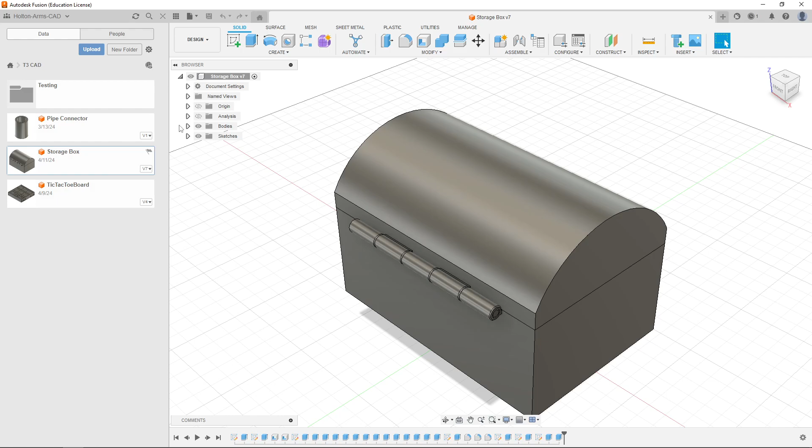I had shown you my example, and I'll just briefly open it up again so you can see this simple design. We can see there's the hinge. In this case, there are two parts of the hinge. If I hide the top and the pin as well, you can see the bottom part has three of the hinge connectors on it. And if I show the top and hide the bottom, you can see the top has two. The combination of both of those when they're lined up properly is 5.

And then down the middle of the hole, we want to have a pin that connects them so they're connected as one piece and they can rotate around that, right? And so that's the pin. We could put outer points in the pin so it's easy to grab, but it's not really necessary. Typically these things are metal, but even if they're plastic, the idea is that the pin stays in between all the different hinge pieces and holds it as one unit, right?

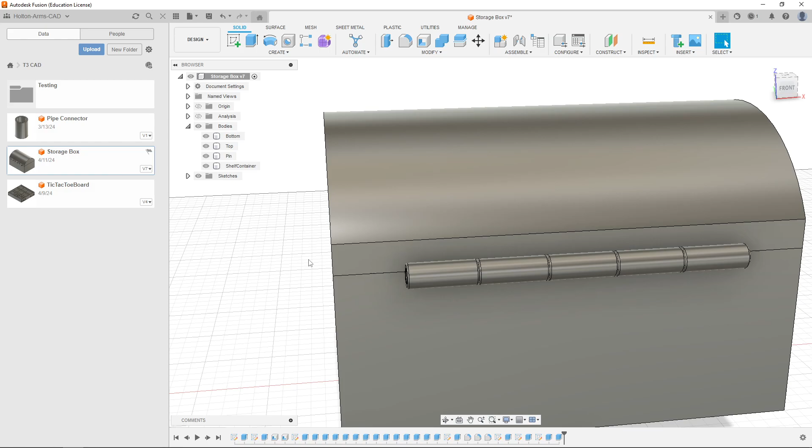So we'll do this with just simply a flat surface. We won't make a complex shape to attach them to. Really the goal is to see how you can make a simple hinge and recognize there are many types of hinges that have many connectors. This is a typical 5 connector hinge, but there are some that are just 3. Depending on how heavy the thing is and how much you want it to rotate, you can get away with fewer or more connectors.

If you need more strength, more support, if you expect it to be a heavy lid or a heavy rotation, doors often have between 3 and 5, and that's enough to hold the weight of metal doors and wooden doors and so on. But that's more the physics of it. For our purposes, if we're 3D printing prototype models, even 3 might be enough for a lot of situations. It just depends on what you're trying to do. And of course, the aesthetics of what you're designing might also have an impact on how complex your hinges look.

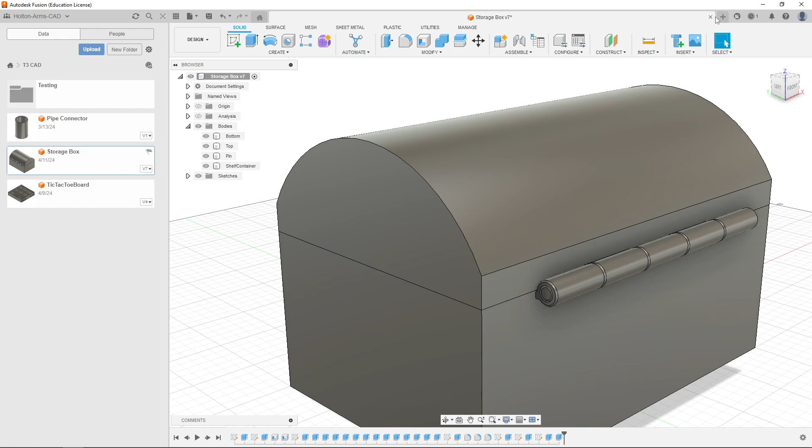So we're going to try to recreate this on just 2 flat surfaces and see how that goes, and we can decide if there would be other adjustments based on what shape you might be creating in the future. So I'm going to go ahead and close this design. I am in my typical project folder, so you can work in the same folders you normally do. I'll hide the data panel so I have as much space as possible.

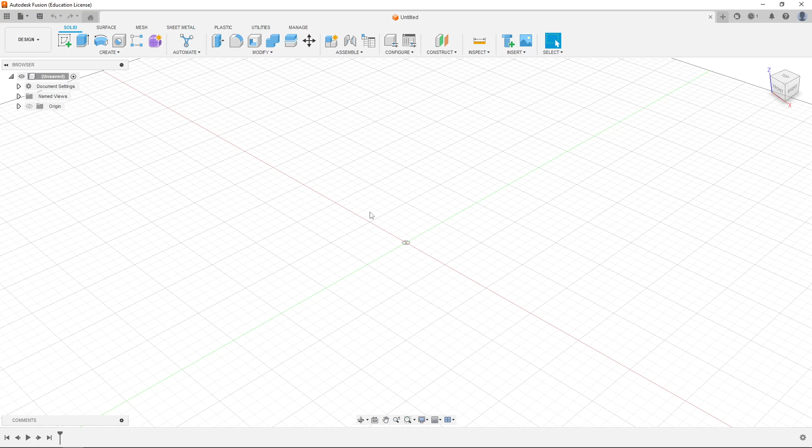I'm going to start off with the sketch. I'm going to make two flat surfaces that represent the 2 objects that would theoretically be the walls of the things that have the hinges on them, or the actual panels where you might screw things in if it's a door hinge, or the walls of the storage container that the hinges are connected to. So I'm going to make a new sketch. The surface is not important, but I typically pick the XY plane, and there we are looking from top down.

What I'm going to do is make 2 rectangles. Again, the shapes are not important. It's really just about having somewhere that you can connect this thing to. So I'm going to make a rectangle. I can use the rectangle button or the keyboard shortcut R. So that's what I'm going to do. And there it is. I'm going to select my origin point to have a starting point.

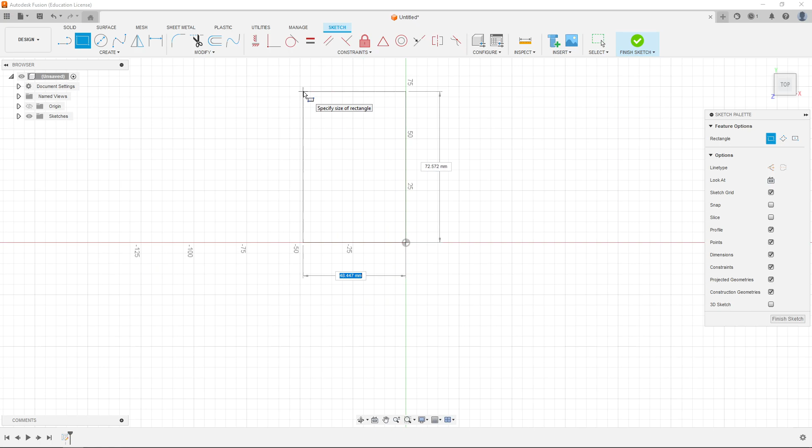The actual sizes are not overly important, but I'll just make them relatively big. So I'll do something like 60 millimeters wide by 100 long. And actually, if I'm going to do this as 100, I have to recognize that whatever the number of hinges I have, I'm going to have them spread across the entire thing. So if I have 100 millimeters and I'm going to have the 5 jointed hinge, then the premise is that each of these joints will be 20 millimeters in width, minus any gaps that we may decide to put in them, even though they should be relatively flush.

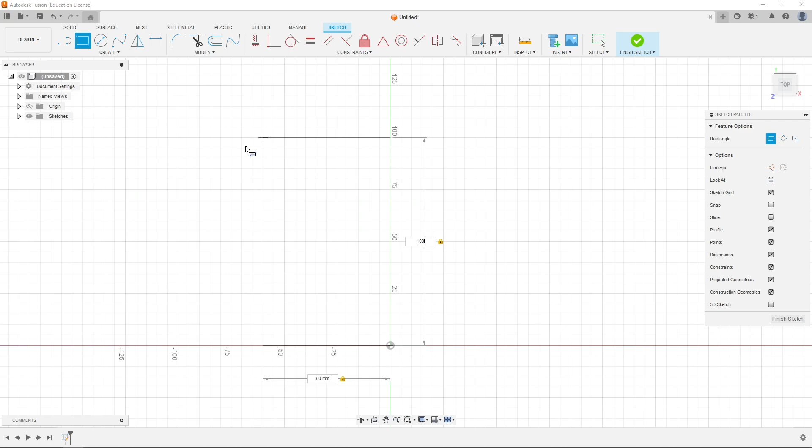So mine is going to be 60 by 100. And so there's one rectangle, that's going to be one of them. You can see it's completely locked in place. There's nothing to move because it's trapped to the origin. I'll do the same thing for another one, so I'll press R again, and I'll do the other side as well. Same thing, I will do 60 this way, and then 100 up, and there it is.

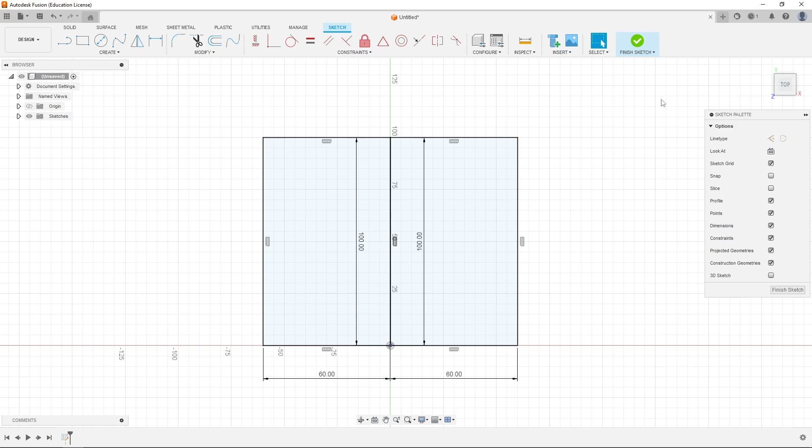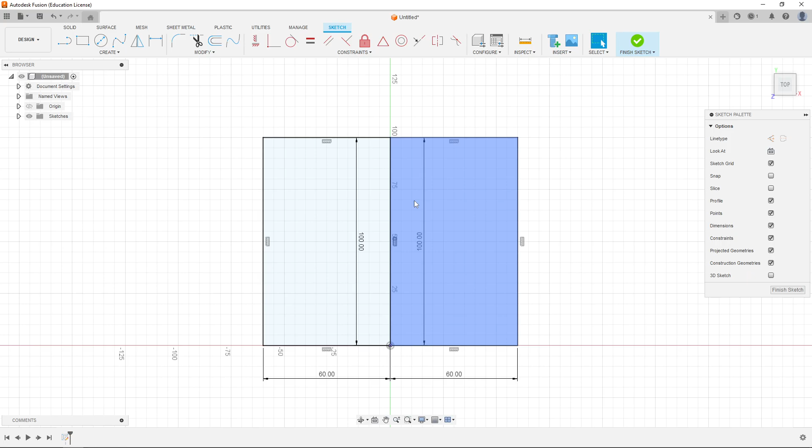And you can see now I have the 2 things. These would be like the 2 flat surfaces. So when I design my hinges, they're actually going to be laying as if they were open, as if the door was flat or the 2 parts were flat when they're connected. Now, not all hinges are like that. You saw in my other design, the hinges were folded over because the top of the thing was closed. So the default position was the closed top on that little treasure chest type thing. So I think that's all we need from this perspective. So I'm going to go ahead and finish the sketch.

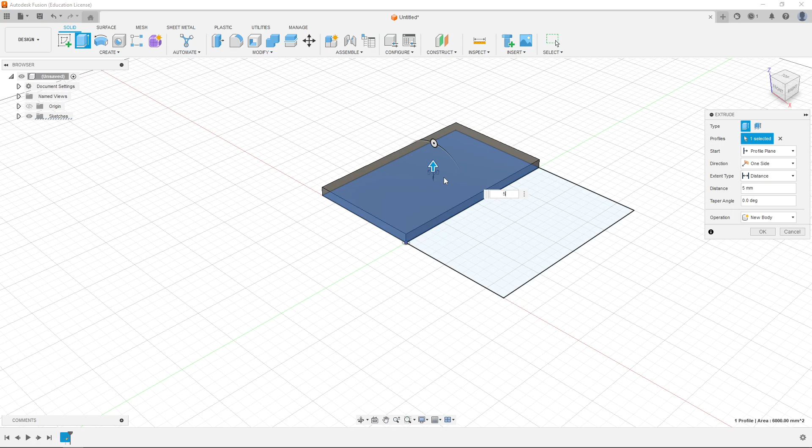And so the idea is that I can make these into 3D, so I'm going to extrude them. I can use the extrude tool, or E as the keyboard shortcut, so I'll press E, there it is. I'll select this one. I'm going to do them individually to make sure that they end up as separate bodies. How thick they are is not overly important. I'm going to say mine are 5 millimeters tall. There's the first one. Again, remember, when you use a sketch to create a 3D object, it often hides it, but because my sketch has 2 parts to it, I'm going to bring it back so I can reuse it again. I'll press E on the keyboard to extrude this.

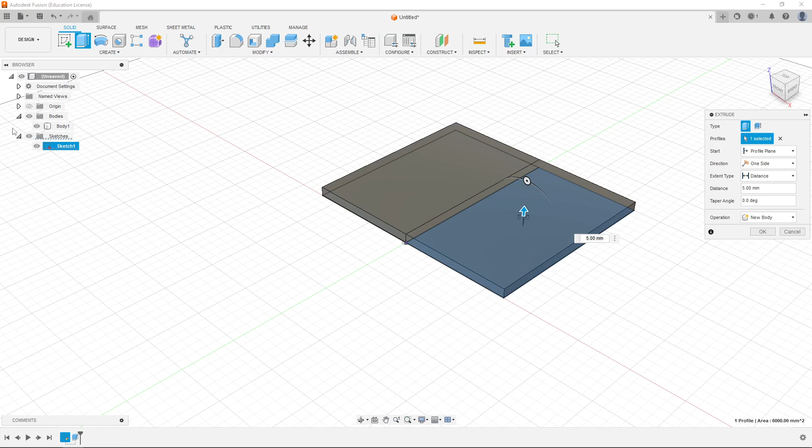And again, notice that by default, since they're touching, it tries to join them. I want them to be separate objects, so I expect them to be two separate bodies. If I don't switch the operation, they will merge into one giant flat panel, which is not what I want. So I'm going to switch from join to a new body, and there it is. Now you can see there is that kind of line across them. So they are, in fact, two bodies. It's also 5 millimeters. I click OK, and there's body 1 and body 2. Those are the two independent pieces.

Now they're very similar in what they're going to be, so to start, I'm going to rotate to the front, and we can see this flat view. And so what I want to do is draw a sketch here that's going to be the circle that's the hinge joint, that connecting thing. That's the circle that's going to go through. And again, I'm making a decision that might seem arbitrary, and it kind of is, where I think I'm going to have this circle centered so that the center point of the circle is somewhere on this line. In fact, if I center it exactly here, I think that will be not unreasonable.

And if not centered, depending on what we're aiming for, we may not want the hinge to stick out from underneath here. We may want it to be flush, so I might also choose to make sure that it is tangent to this bottom line. And so that's something we have to decide on as we go. So we'll start off with that.

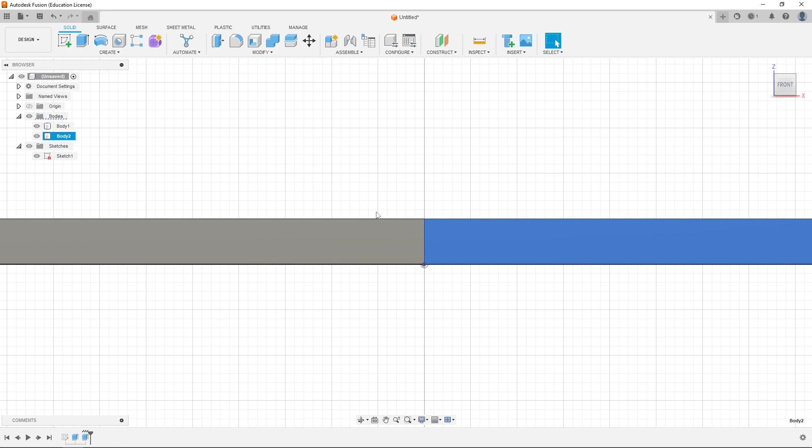So what I'm going to do is, to make this easier, I'm going to focus on one surface, and the reality is chances are I could use a similar sketch on both surfaces, but I'll start with one at a time. So I'm going to hide body 2 to begin with, and I can actually hide sketch 1 which is underneath here, because I'm no longer using this. So I'm going to make a new sketch.

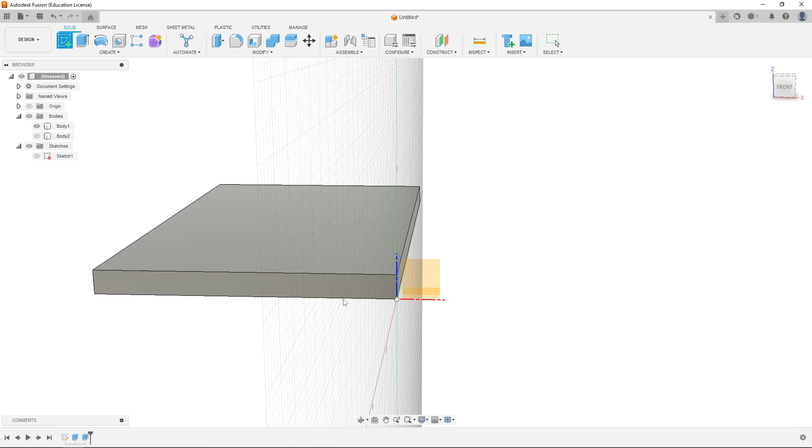Instead of choosing one of these planes that are floating there, I'm going to draw on this side surface, so that it's flat, and there it is. I'm going to make a circle, using the circle button, the create menu, or C on the keyboard by default. So I'll go ahead and do that. All right, here's my circle.

Again, if I use this origin point, that's not going to be where I want it. I could find the midpoint, and that's not unreasonable. You can see the little blue triangle shows up next to the X, meaning we're at the midpoint of this tall line. That might not be unreasonable either. And really, if I choose it, it's going to lock it in place, so I might have to detach that constraint if I realize it's not what I want, but we can decide from there.

So I could also just make sure it's somewhere on this line. As long as I see the blue X, that might be reasonable. In fact, I think that's what I'm going to choose to do. So instead of being stuck to the midpoint, I'm going to pick somewhere a little bit off the midpoint. And so there it is.

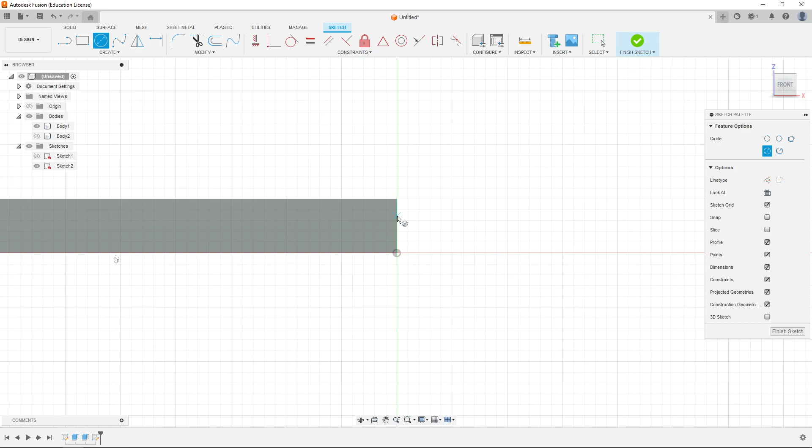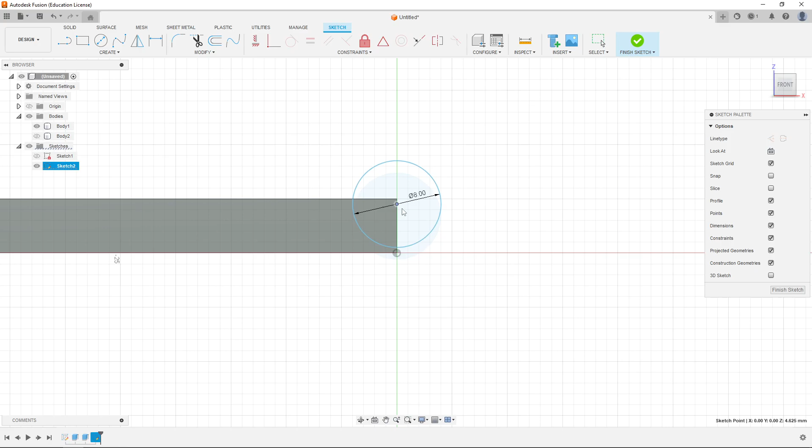I'm going to choose a size, and the idea is that I want it to be tangent. So I should pick a size first, and then force it to be tangent to that bottom line, so the size is not dictated by the tangency, but it's the other way around. I'm going to choose 8 millimeters for the size of my circle, and you can see it overlaps. But because I didn't lock it to the midpoint, I can actually drag it and move it along this thing, which is perfect. So I'm going to move it a little bit higher.

You can see it's not tangent, but now we can try to use the tangent constraint. If I select the constraint menu - and the order is not overly important, I can pick the circle first or click the constraint first, it's not important - if I click the tangent constraint, it knows what it needs: a line and a curve, and then it forces the line to be tangent to the curve. If the line is locked in place like this one is, that will force the circle to move.

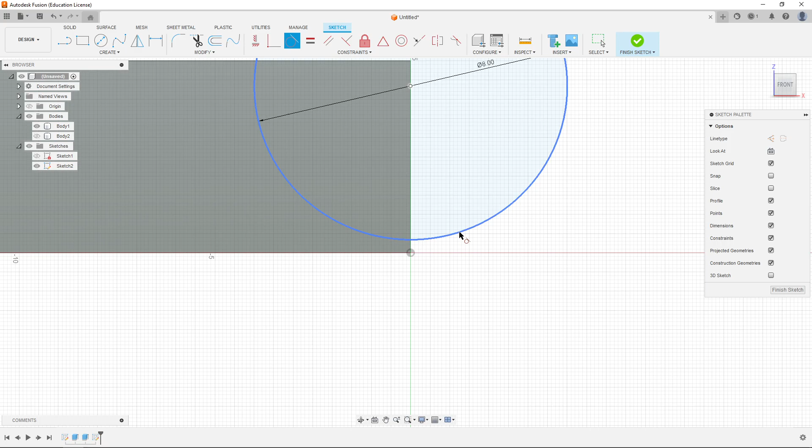So that's what I'm going to do. I'm going to select the circle - there it is, that's my first piece, you can see it stays blue. I'm going to choose this line. This line is locked, so the circle jumps and snaps to it, and there it is, tangent.

And so you can see that the circle now is tangent to that bottom line, but it is also on this thing, centered on this line somewhere. It's not perfectly centered, but that's okay, and this is what we expect. And of course, depending on what diameter you chose, that might be more or less. But there's my first circle.

In fact, I'm going to do another one as well, because the claim I'm going to make is that I do need to have the inner circle. That's going to be the part that's scooped out, where the pin comes through. So this inner diameter that I'm going to choose, that's how thick our pin is going to be in diameter.

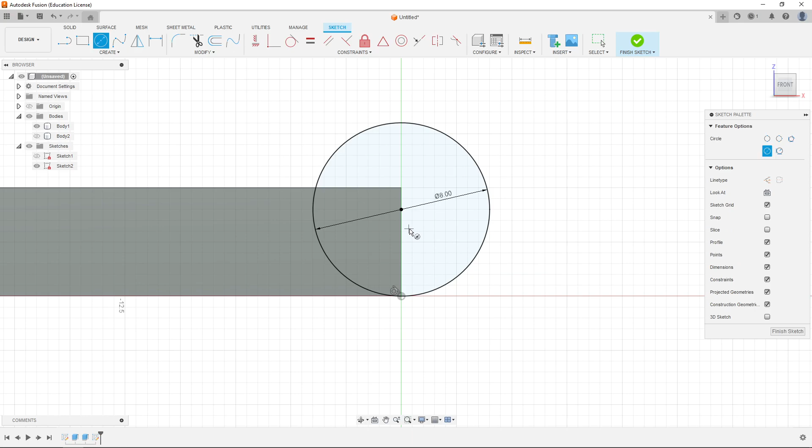So I'll do the same thing. I'm going to use C to make a circle, and this one I do want centered at the same point this one is. So now that I have it, I can actually use this as a center point, which is fantastic. And then I can simply choose a diameter that's there.

I'm going to choose 5. So I'll use the dimension tool, or D on the keyboard, choose it, and type in 5 exactly. So there it is, 5 millimeters.

You can see it kind of highlights automatically. You can imagine that's the part that's going to be solid, and everything else that's not selected, including chopping out all this solid, will be the hole that the pin could potentially go through once this thing is solid.

One last thing I'm going to do, which would be convenient: I think I should potentially have a line, because at some stage I might want to cut out some of this so there's not too much solid. We often want a little bit of space for the thing to spin freely, so we're going to make sure we cut that out as well.

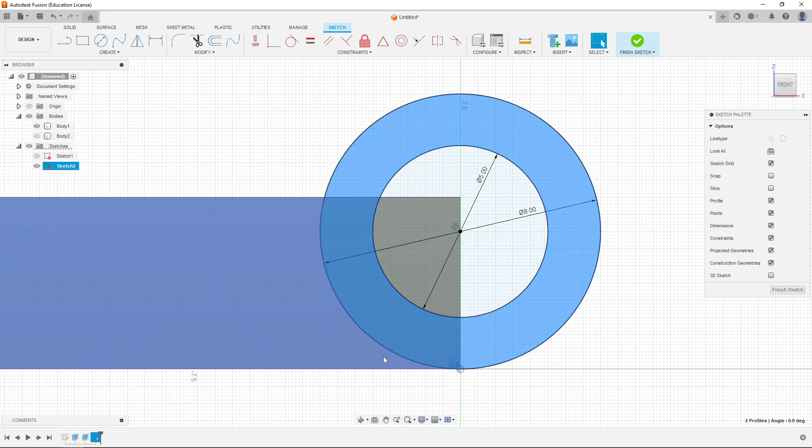So I'm going to go ahead and use a line tool. I can select it or use L on the keyboard. And there it is, L on the keyboard.

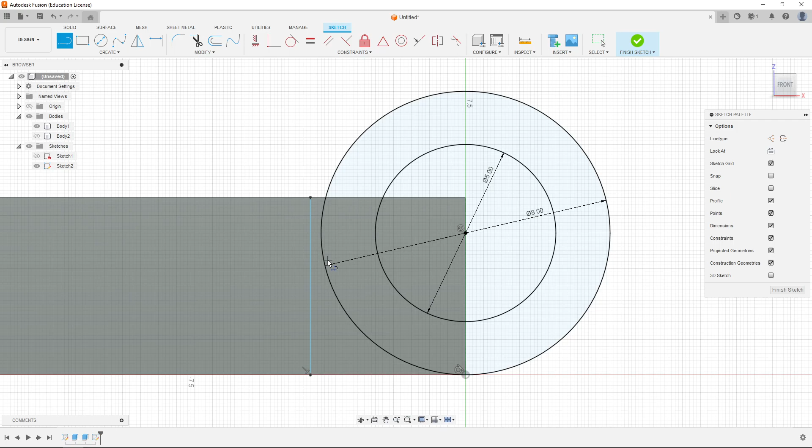I want a line, so I'm going to roughly snap it to the top of the square. I'm going to snap it down, go straight, make sure it's vertical - you can see the little right angle symbol. It's not touching the line, so notice how the line is blue, meaning it's not stuck, so I can move it freely.

What I'll do is make sure it's tangent to this circle. We can see the other constraint that already exists is perpendicular, which means it's a 90-degree angle, which is fantastic. We'll use that tangent constraint again.

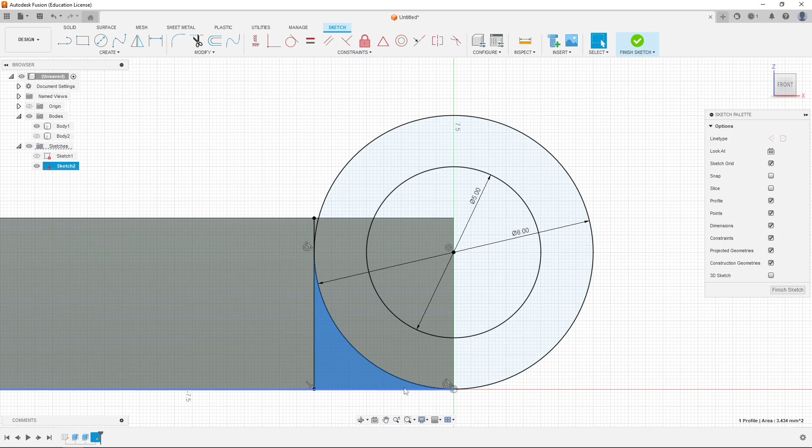I'll choose the circle and the line, and you can see how it jumps to it. That way I'm able to kind of scoop out this portion if I need it. You can see now it's a selectable area. So in the future, if I need to cut this out, I can absolutely do that.

And if I needed to, I could also cut out this little piece, which I don't think we're going to do, but we could if we needed to.

Right now, if I change the angle, you can see - even though this is a flat drawing - the premise is we could imagine extruding a lot of this out, and we would potentially end up with a circle that goes all the way through.

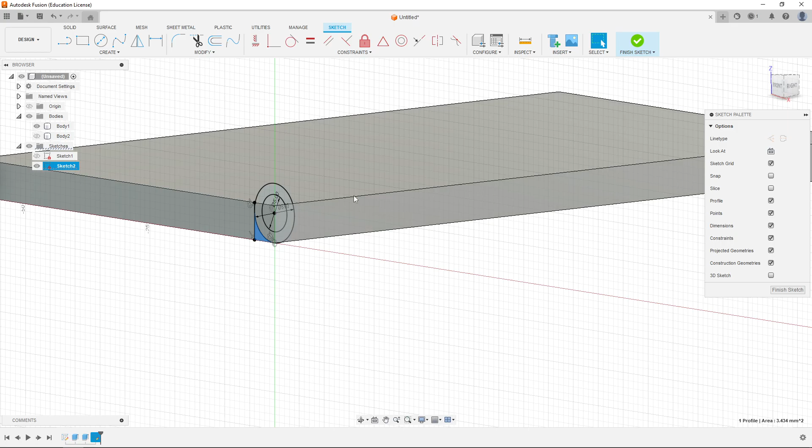So I think I'm happy with my sketch from a front perspective. I think it's everything we need. We can always come back and edit it if we need to. I'm going to click Finish Sketch, and there it is.

So now the next thing is, let's extrude this thing all the way out and see what it looks like as we do that. So I'm going to choose just this piece.

Of course, I can also choose this inner piece, but it doesn't really do anything since it's already - make sure that's not selected, so just that part. Because it's just going to be in the solid, so I could do that if I wanted to, but it's not strictly necessary. The reality is this is all part of it.

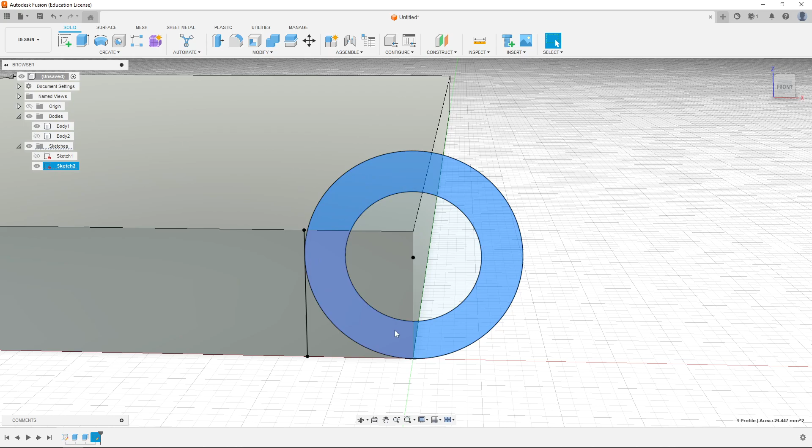I'll do it just so it kind of gives the feeling of, oh, we're extruding the circle all the way through. So let's do that. I'm going to click E to extrude. I'm going to drag it all the way through. You can see by default it is to cut, because it is passing through a solid object.

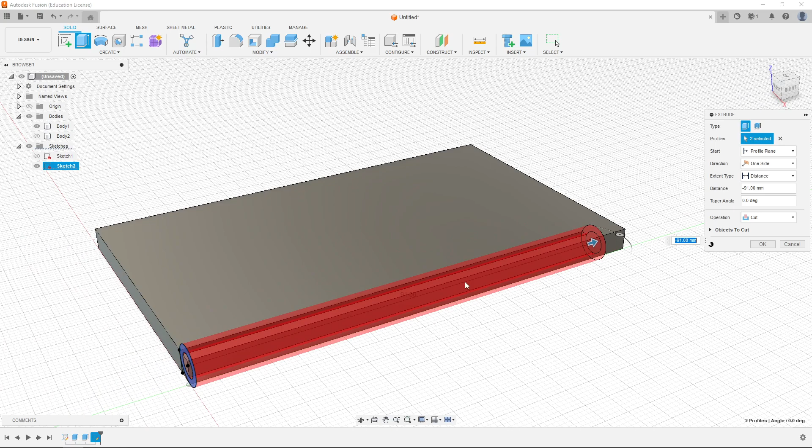And then that would leave this part. That's not what we want to do. Instead, two things: one, I want it to go all the way, and I know how long this thing is - it's 100 millimeters. So I could stretch it to 100 and say, oh, it's exactly flush.

And notice how it's a negative 100 to go inward. Or something that's a little more consistent, so that if I ever change the size of this entire flat surface, I don't have to go back and change the size in this extrusion. I can simply say, extrude all the way to the other side.

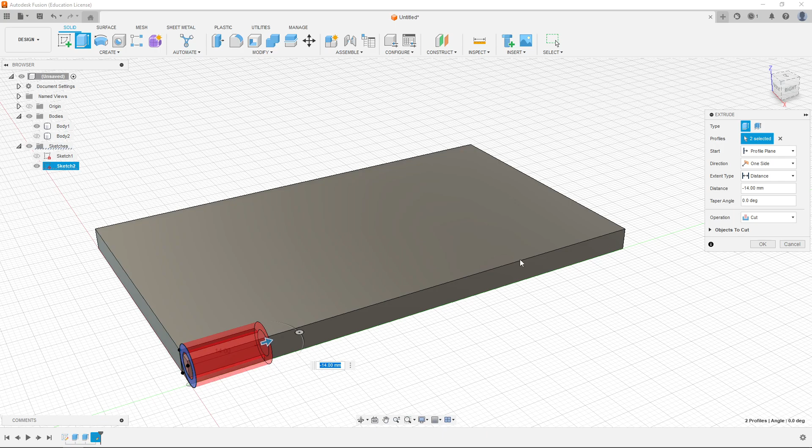So we're going to do two things. First, instead of making this a cut where we see red, I want it to be a join, so you can see this will be a solid object, a tube that goes all the way across. The second thing I want to do is I want it to go all the way up to this wall flush.

So instead of choosing extent type distance, which is the typical default, I'm going to say to object. I can say all as well, but the problem is it doesn't really know what the all is, because even though this thing has a length, it doesn't really understand that. So all is not a good choice.

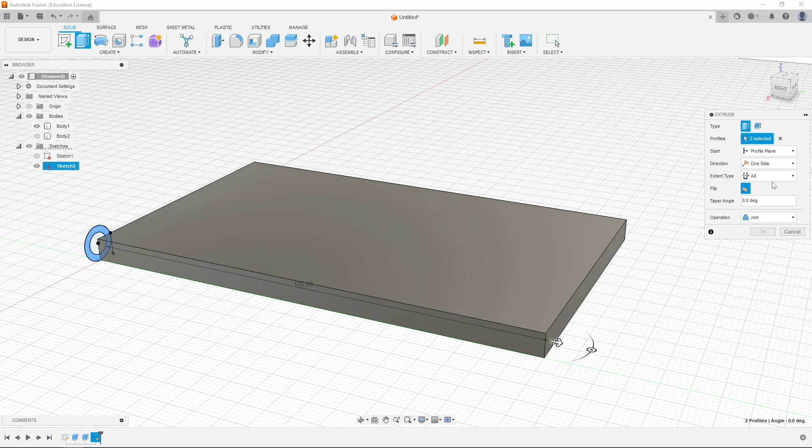Instead, we're going to choose to object, and it says okay, from this point, where do you want it to end? Notice that I can actually choose individual sides, so I'm going to pick this side right here. You see it's a little bit highlighted, and notice how it jumps exactly there, right? And there it is, flush all the way through.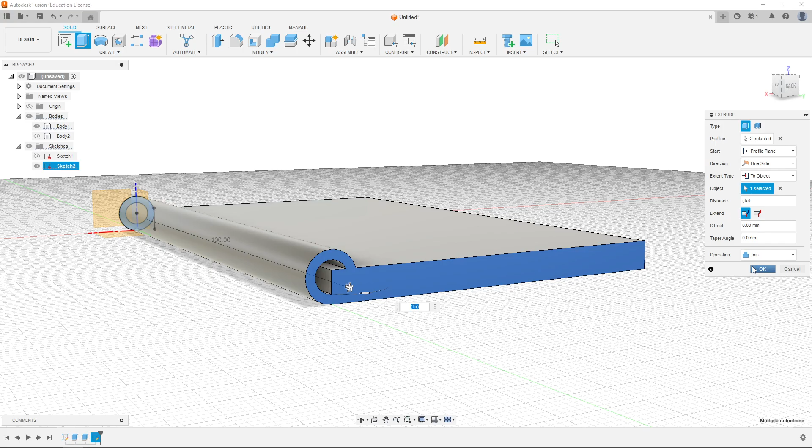Notice it is To, but that is in fact 100 if I really needed to know. It is that way, but the idea is that if I made this 150, this would stretch automatically. So I'm going to go and click OK.

And there's my first extrusion, so now it looks a little bit better. Of course, this block in the middle is no good, you couldn't put a pin through that. So let's bring back our sketch.

Now what we can do is we can select this portion and do the same extrusion, but cutting out that inner part. So let's do that, we're going to go ahead and do an extrusion. I'm going to hit E on the keyboard, and start pulling it through so it turns red.

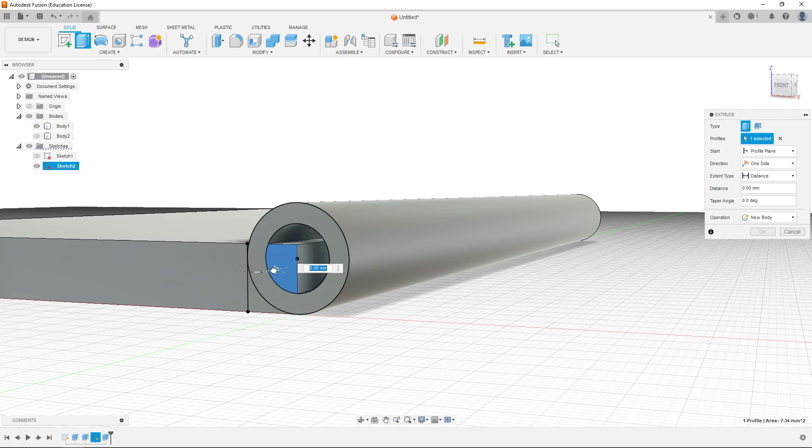And then this way, in fact, I can do all, because it's going to be smart enough, I think, to go all the way to the end here. So instead of saying distance, let's say all. And there it is, it goes all the way to the end. It is a cut, I click OK.

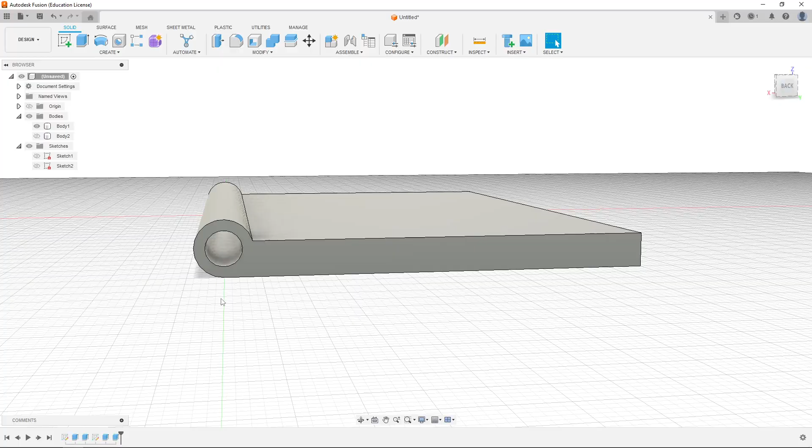And there it is, and so if I hide this temporarily, you can see that almost looks sort of like the beginnings of a hinge, right? Except this is one solid tube, which would be fine if that's all it was. But of course, we want something to connect or mesh with it, and we can't do that just yet.

So let's go ahead and continue with this piece by chopping it into individual pieces so that the other one that connects can go through. And so this is an arbitrary decision.

Does this side have the 3? If I'm going to do 5 different hinge connecting points, am I going to do 3 on this one and 2 on the other, or 2 on this one and 3 on the other? Really, that's kind of an arbitrary thing.

What I'll say is, okay, I know I'm going to do 5, so I know that if it's 100 in length, I can divide that by 5, and I expect each one to be about 20. To actually save ourselves the hassle, because again, the premise would be if we change it from 100 to 150, then I would have to go and recalculate that math. I don't want to have to do that.

So when we type in our numbers, we're not going to type in 20. We're going to actually type in literally 100 divided by 5, and that way we don't have to change anything. If we had to change something, it would be one number, because the division by 5 would automatically calculate, oh, this is actually 20 because 100 divided by 5 is 20. And that would be up to the machine to do that math for us.

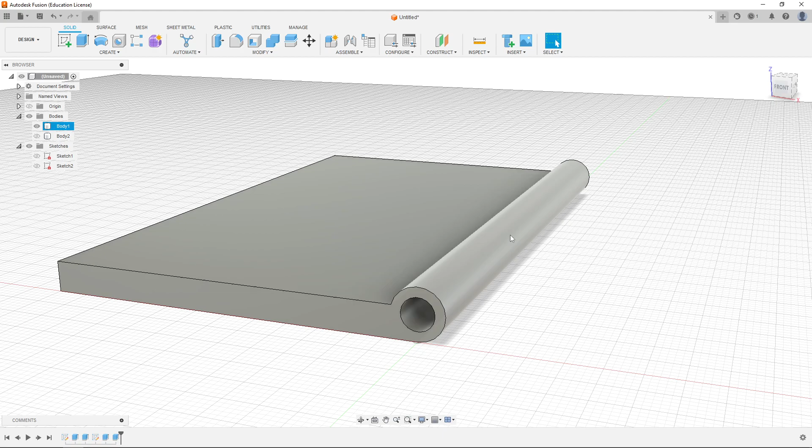I am going to bring back sketch 2. So what I'm going to do is I want to scoop out a portion of this that's going to be cut out. I'm going to select what should be cut out is the entire circle, and this part as well, because that means the other circle is going to have kind of a connecting mesh, and so that can't be in the way to like scrape against.

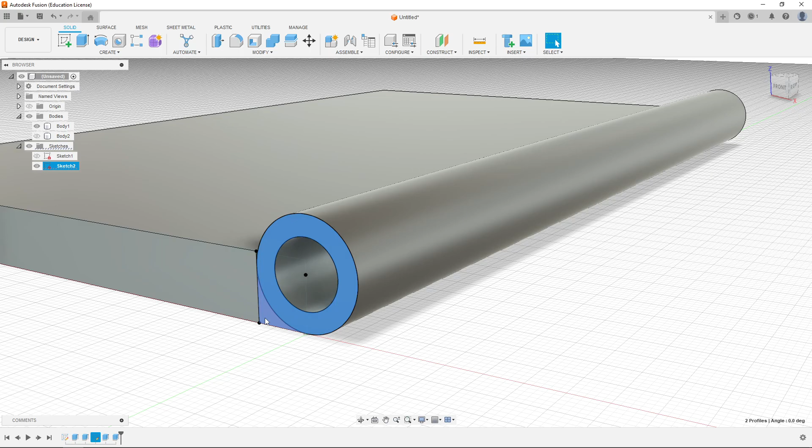I mean, it could be, but maybe it would be better for it not to be there. So I'm going to select this as well. I'm holding shift, so all of that is selected. I'm going to do an extrusion, but of course, again, I'm deciding, am I doing 3 or 2? I'm going to do 3, so it's going to be 1 here, an empty space, a second one in the middle, an empty space, and then a third one at the end. So there's going to be 3 on this side and 2 empty gaps.

So if I scoop like this, I could do it this way where there's 2 in this one, so an empty gap, a solid, an empty gap, and a solid, and an empty gap. But in reality, I want to keep this solid. So instead of doing the extrusion from right at the beginning, what I should say is, can you start this extrusion from somewhere further along? Notice it's at -19. In reality, it should be about 20 long, and it should start 20 in.

So extent type is fine, distance is fine, -20. This start, instead of being from the default profile plane, which is where our drawing is, we can say, how about start from some offset? Notice when I press offset, nothing visually changes, but I get an extra option. It says, where do you want to actually start? I know that to go this far in, it started at -20, so I should probably also start at -20.

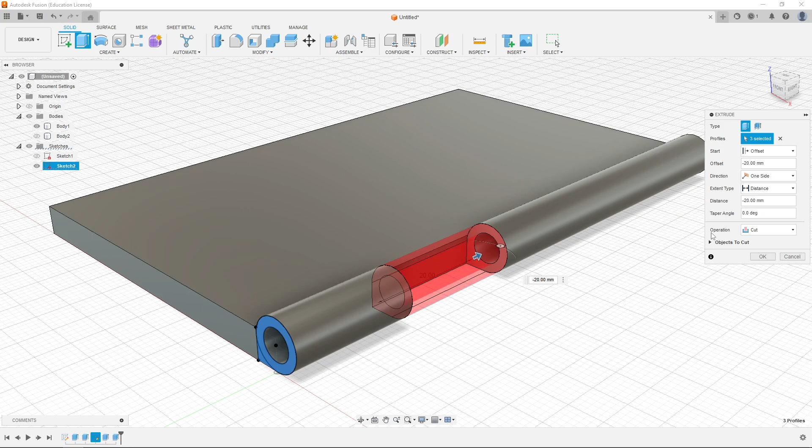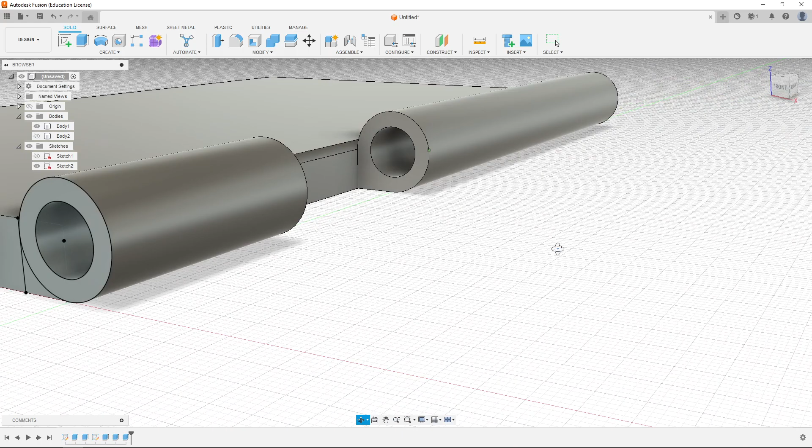So I'm going to type in over here, -20, and now see what happens. It says, okay, you want to begin at -20, and then you want to move -20 inward. So the result is that this part stays solid, and notice it still has the solid piece there, but this part has the wall cut out and this actual scoop cut out. So I'm going to go ahead and click OK. And you can see that's that first piece. Looks pretty good. The next thing I want to do is make this happen again.

But do I really want to go out of my way to do the same thing offset? I could, but I can also use a pattern. That's another thing I'm going to show just to refresh everyone on patterns. We've done patterns in another video for sketches, but you can do patterns on 3D components as well. In fact, this whole chopped out piece could be considered a feature in 3D. So we're going to try doing that before we finish this video off, and we'll finish the rest of this in a second video.

So to make our pattern, I'm going to go to the Create menu. In fact, it is already right here at the top, a rectangular pattern. But just to show you, in the menu for patterns, we could do rectangular patterns, path patterns, and circular patterns. Rectangular patterns go in 2 dimensions; they're basically a rectangle of shapes that you could recreate. Circular pattern is the same, but radially around some center point. A pattern on a path is the same thing as a rectangular, but follows a path even if it is curved, which is actually a really powerful tool.

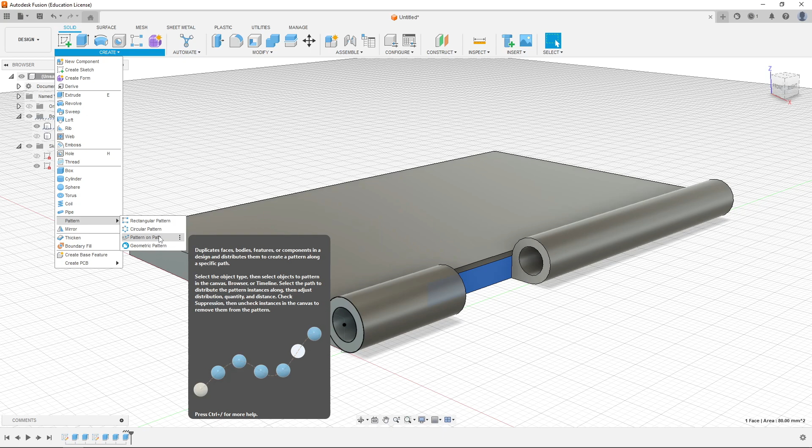And notice what they all say. They duplicate faces, bodies, features, or components. So really not just flat images, but could be 3D things as well, including cuts and joined bodies and things like that. But I'm going to choose the rectangular pattern. And you can always change the pattern from within the rectangular pattern menu. It even gives me the buttons here.

It says, well, what are you trying to duplicate? The default is faces, so that's a face, and this is a face, and so on. But I actually want the whole scooped out part, so I'm going to change it to a feature. A feature is a little more complex, but you can actually see, if I hover over this thing, all the outside is a feature.

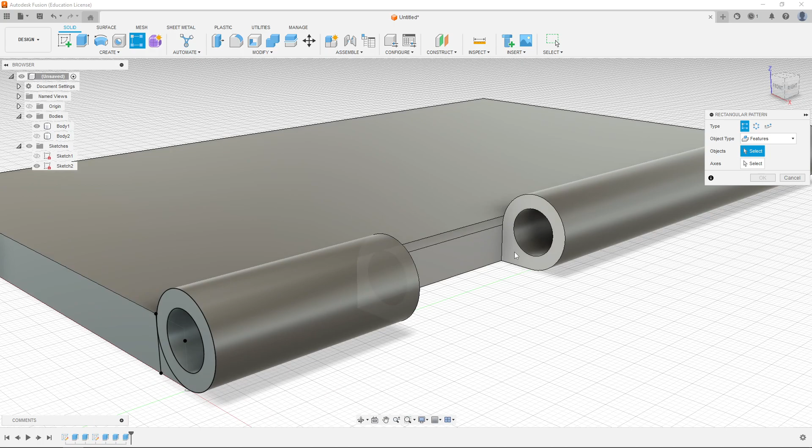And in fact, if I hover over this inside face, any part of it, it recognizes this whole chopped out piece as one feature. You can kind of see the shadow of it as I rotate. You can see that it gives it over this area. So in fact, this is what I want to duplicate. There it is, and you see it highlights it all blue. And I want to duplicate it in one direction. It says, what axis do you want to use?

Now here's the only problem. Before I can do this, I must choose an axis. And we're going to try it. We can use this green one because it's at least going in the right direction. But if it doesn't work, then we can always create another axis that goes actually through the center. Let's try this green one and see what happens. And if it doesn't work, we can always swap out. And so I selected it, and there's my axis selected.

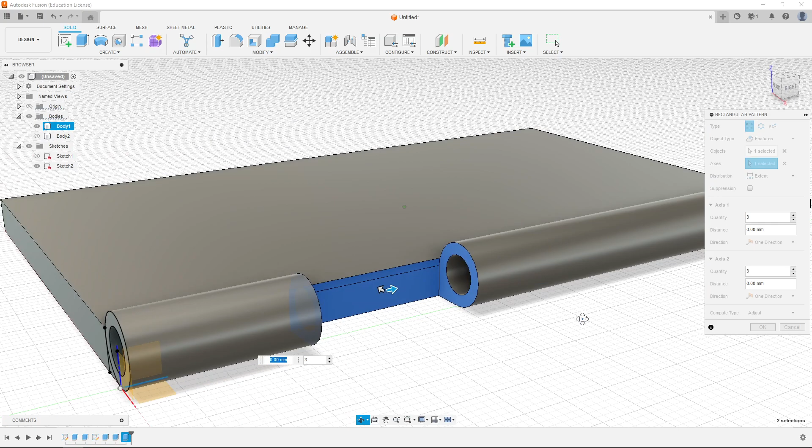The last thing it's going to say is, okay, how do you want to extend this? How do you want to distribute it? How many do you want? If I use the arrows, I'm not going to pull this one that way because I do not want to scoop it out of the solid. I instead want to scoop it sideways. And you can see it gives me a preview. And it says by default, there's 3 of them. And so if I do 3 of them, it's going to say how far apart are they. You can see right now it's 38 millimeters.

The extent, notice what it's going to be. The extent is distributing the pattern evenly along the full extent of the distance value specified. So it says, I've typed in 38 or moved to 38, spread out the 3 things across 38 millimeters. I could do it that way, or I could do it by spacing, which says instead the number you give it is how much space is between them. If I read this little thing, it says distributes the pattern instances so they are spaced at the distance value you specify. So that might be a better choice. So I'm going to choose spacing.

I know the spacing should be 20, so I'm going to put 20. Not 2,000. There it is, 20. And then you can see, unfortunately, there are 3 of them, so that's why they're all flush. I'm going to change the quantity from 3 to 2. And notice now they're next to each other, which is still not correct, because if this one's 20 and this one's 20 and this one's 20 and then this one's going to be 20, then actually this one and the second one I'm creating should actually be 40 apart.

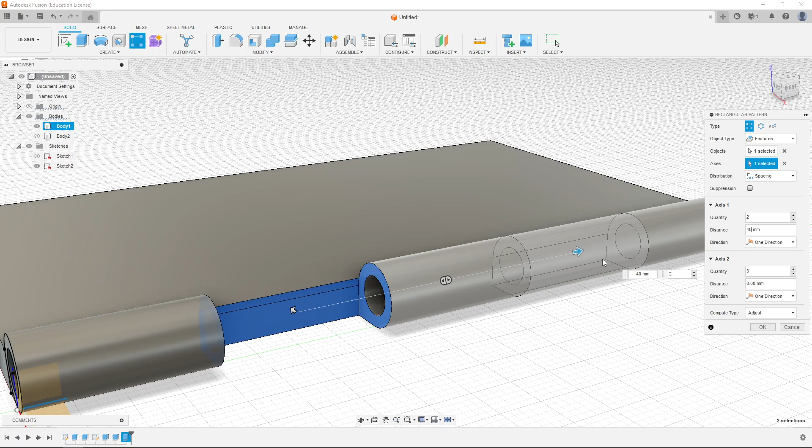So if I double this to 40, now we can see the solid one is the original that was created. The cut feature was made by doing a single cut, and the second cut will be 40 away. So the 20 from this edge to here, and then another 20, so that's 40 total. End result being over here. So I click OK, and there it is. You can see that's our hinge. The first part of our hinge anyway. So I'm going to hide this sketch. You can see this complete solid thing, and that's pretty good for a first try.

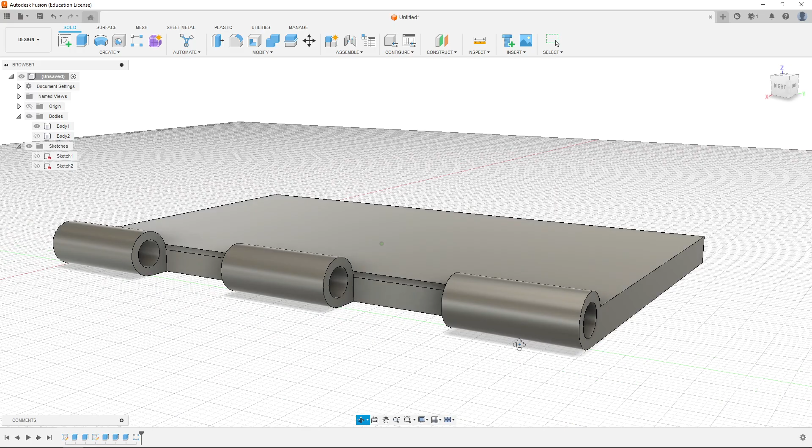So I'm going to stop this video. Our next video we'll do the other half, which will be pretty much the same thing, but just the other two. And then the last step we'll do in that video as well is to make a pin that goes through them all. I'll do a very simple pin, but the reality is you can make pins as complex as you need to if you want to have a cap on it to make it easier to pull out and things like that.

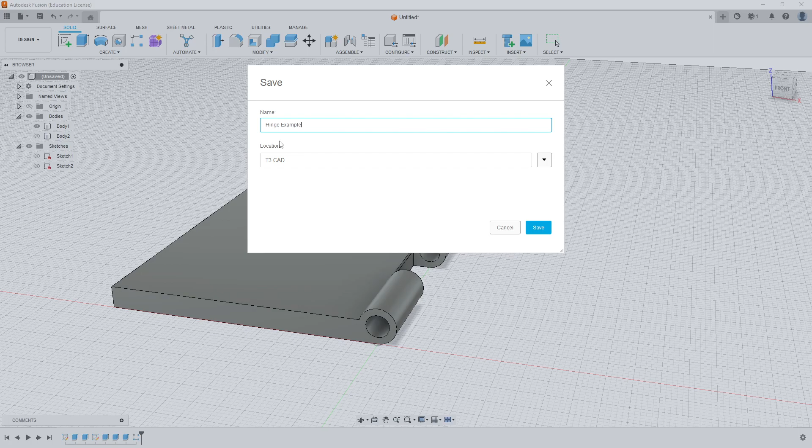Oh, first, let's make sure to save. Of course, it's really important to do. And so we'll go ahead and call this hinge example. I'm going to save it. It's in my T3 CAD folder. I'm going to save it once. There it is. And then I can stop here.